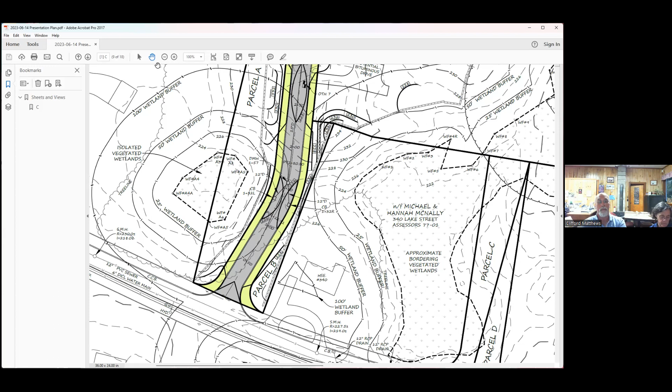Okay, yeah. So do some enhanced plantings in here. You know, if you can quantify the area and come up with a proposal for supplemental plantings in the area, that would, I said crossing, but I mean the road location. Yeah, understood. Okay, that's fine. Okay, I'll include that in my submission package to you.

Okay. And then the next thing, of course, is the crossing itself, the actual crossing. Right? Did all the commission members come out and see this, Mr. Chairman? I know that we had, we have to be careful. We did not conduct a meeting, but I think a majority of the commission members were present.

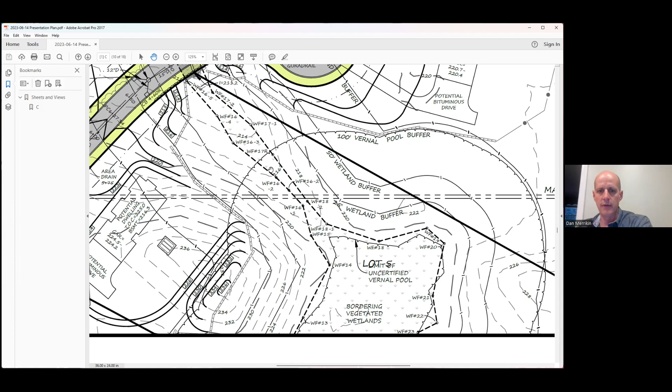Okay, so just for anyone who wasn't there, basically this wetland is an intermittent flow path. I would say 80% or more of the year there's zero discharge from this upper wetland. It all soaks into the ground because this is all sand and gravel up here. When we get a lot of rain, persistent rain, you'll get an overflow, which comes down this valley right through here, and then it ends up in that southerly wetland area.

So we have a crossing proposed here, and we are going to provide you with a little detail with a replication area. We are proposing a retaining wall on either side of the road to minimize our impacts to the wetland crossing there. And I do have a drawing that outlines this. So this is the crossing.

So there's 2,022 square feet of permanent impact to bring the road across. And that includes the road itself, the paved width of the road, plus the grass strips on either side. And then there would be a retaining wall along the edge of the right of way on either side. And then we would just grade into that retaining wall. We have picked out a replication area.

The consensus, or my view in the field, was that this particular area is not a very solid wetland. There's no hydric soils. Particularly to the north here, there's not a lot of wetland vegetation. So I don't think this vicinity would be a good place for a replication area. So instead, what we focused on was there's an old cart path, this dark green area down to the bottom left of the screen.

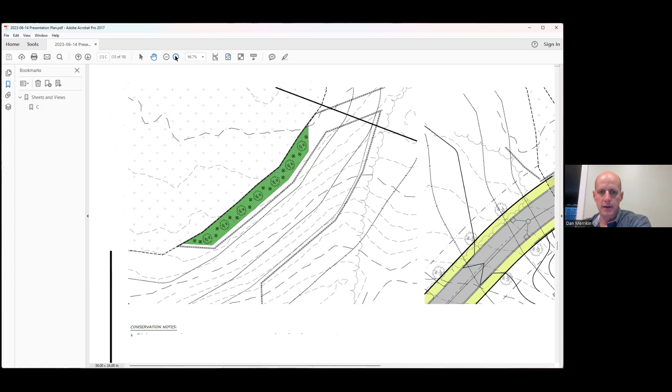It's an old cart path, right next to the wetland, so it seems to me that's a good location for a replication area. It would be at 2 to 1, and we would basically take the entire cart path, making our detailed decisions regarding grading and elevations in the field.

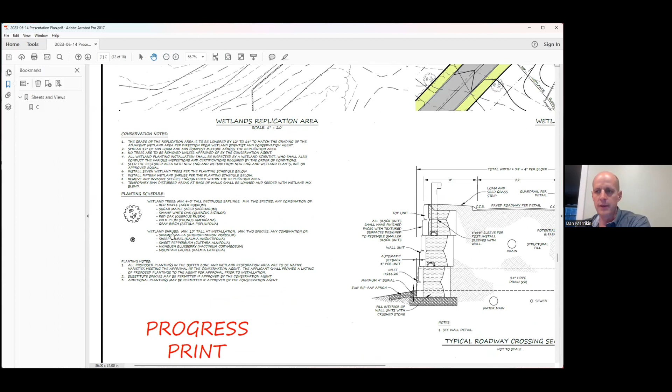Grass plantings would be a wet mix. We've specified on the plan different types of trees and shrubs that could be allowed, subject to the approval of the agent at the time of installation.

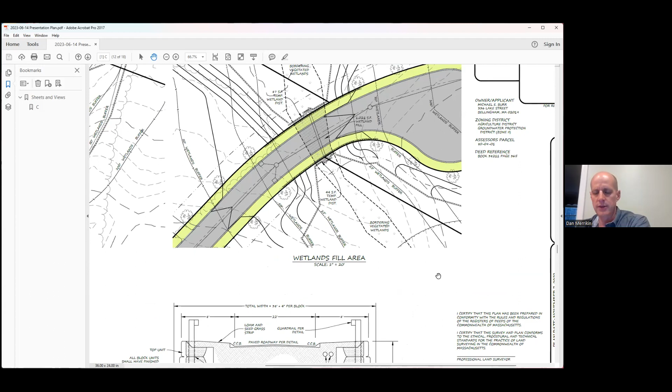This would be a cross section of the crossing, which would be a wall on one side and a wall on the other, with a little guardrail on top, the road in between. Underneath, we're proposing to run 2 18-inch drain pipes to allow, when this upper wetland overflows, that water to pass under the road and continue on its way.

That's probably twice as much pipe capacity as you'll need. We sized it very conservatively so there would be no restriction to flow. There would be a little riprap apron at the mouth of the pipes and another at the outlet of the pipes.

Are there any questions or comments on this? I think, Dan, we'll start with the easy stuff. The area for proposed replication, we reviewed in the field and determined that it was entirely appropriate. We look forward to reviewing the methodology and protocols you're going to use to establish that.

The wetland delineation that was different from the original filing, we've also reviewed in the field and found to be accurate.

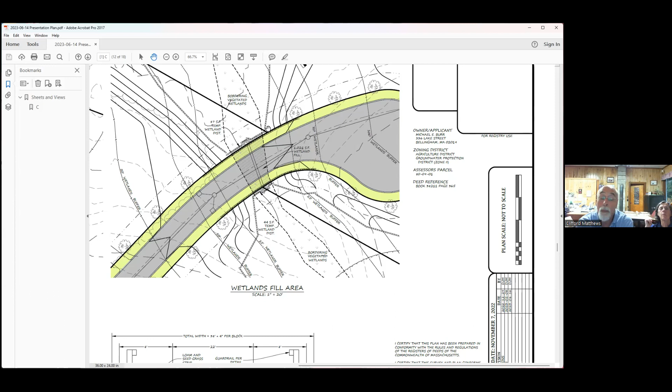I know there's one thing we looked at in the field and it doesn't appear, and there may be a reason for it. We requested that you shift the roadway a little bit to the north to take advantage of the most narrow point of the crossing of the resource area. Have you been able to do that? Because I'm looking at the plan and I don't see that occurring.

And so the issue—I'm sorry about the noise, we're getting a good thunderstorm here. Yeah, we're getting one too.

The issue with that is we have certain upland area requirements for the lots in the zoning district. These lots are all right at that boundary, and I don't think we can move it further north.

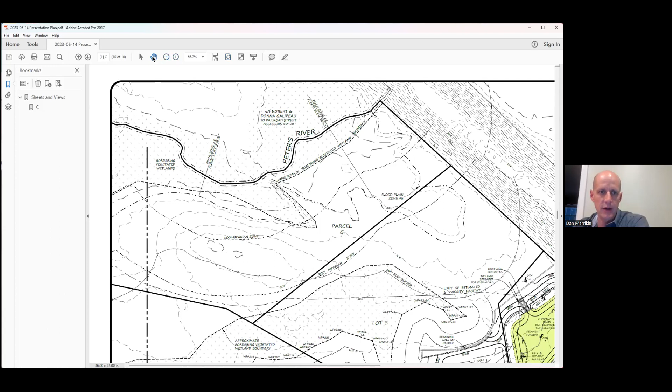Could you enlarge that? Sure. And this area is the area where that log kind of bridge is. That log bridge resides right in here, in this stretch right here.

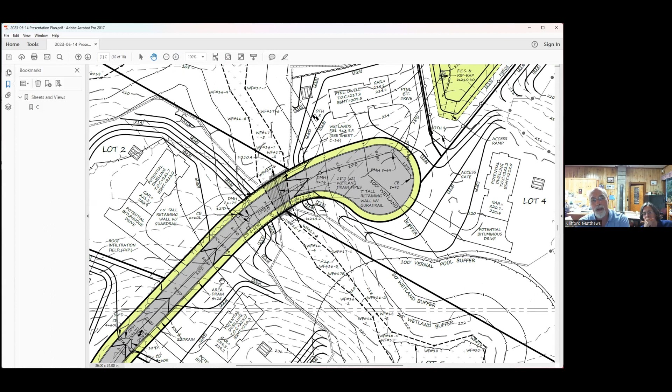Yeah, and so these are the upland requirements. Is this the lot definition that says 90% of the lot area required shall not be under the jurisdiction of the Conservation Commission? Correct.

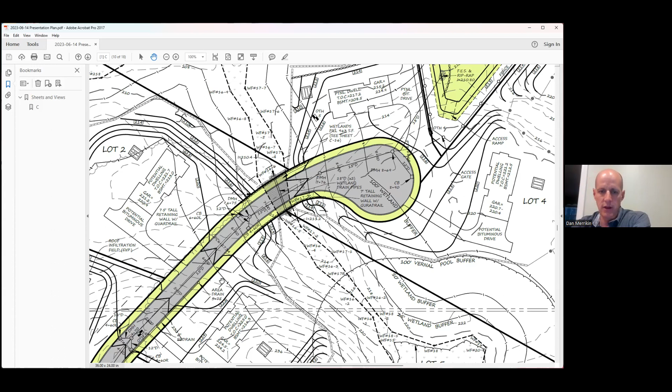I can look to see if we can, but I don't think we can move it more than a couple of feet. We really tried to curl this cul-de-sac in as far to the north as we could while still meeting the zoning requirements for each of the lots—for lot area, upland area, shape factor, and all of that.

Dan, could you shift that screen a little bit higher? I want to see that lot. Yeah, right there—that's a really large lot. This is 2-acre zoning. Yeah, it's all 2-acre zoning. Okay, so you need 80,000.

And so that upland area—now there appears to be upland area to the rear of the vernal pool. Let me pull up the layout sheet. Okay, that's good. Yeah. Okay, good. So there's lot 5, what I'm thinking here—this is lot 6.

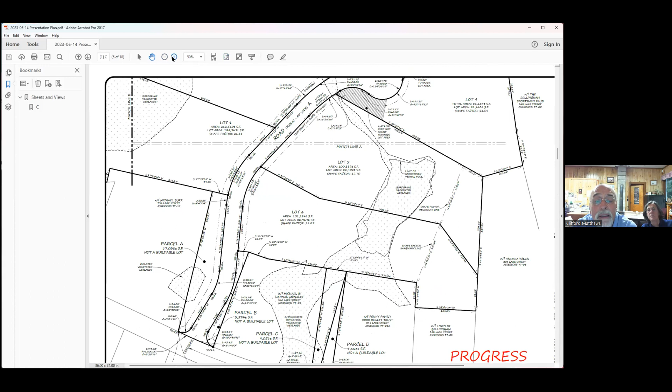So you need 80,000 square feet. Did you include the area that was on the opposite side of the wetland? Yes. That's a big lot. Well, it's 100,000 square feet, but 18,000 to 19,000 of it is wetland. So the lot area is 80. There's an extra 2,400 square feet there—not a lot of extra room.

Okay, and with the shape factor, which is very limiting—especially the back portion won't be included—right, with such large lots, it just becomes very difficult.

Okay, and it's the same thing on lot 4? Yeah, the lot area there is 81,000. The zoning lot area is 81,663, where you need 80,000. For these lots, I moved the road as far north as I could while getting all these lots to work.

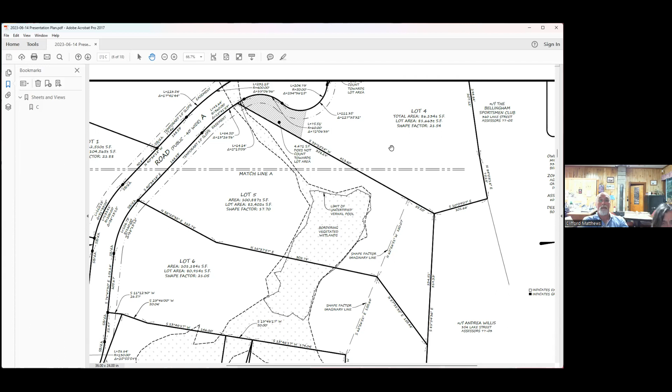We'll take a look at that. Yeah, when we get the full-size plans - it's so difficult for us to work off of PDFs on a computer. Sure, understood. We're old school.

Any other thoughts or questions on the crossing? Only that if there's anything at all that you can do to minimize the impact, it would be greatly appreciated. All right, okay, I'll revisit that and see if there's another option.

Mr. Chair, I have a quick question. So what prevention or protections can be given to that road where it's raised up? I think you had said, Dan, on the side walls it's like 6 feet of roughly elevation. Right, around 6 feet, yes. So we've got a flat road going across with a slight incline up with a log crossing area and tapered down to this wall that's less than 6 feet.

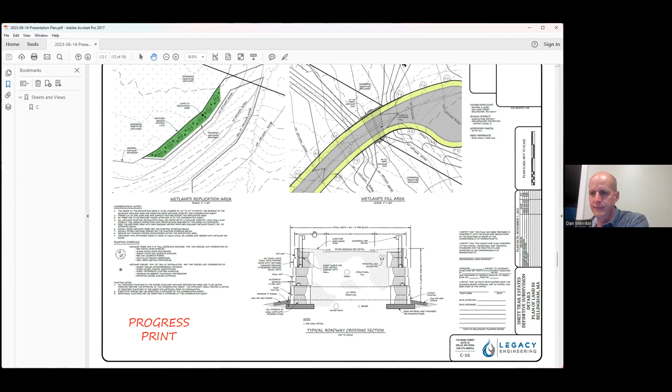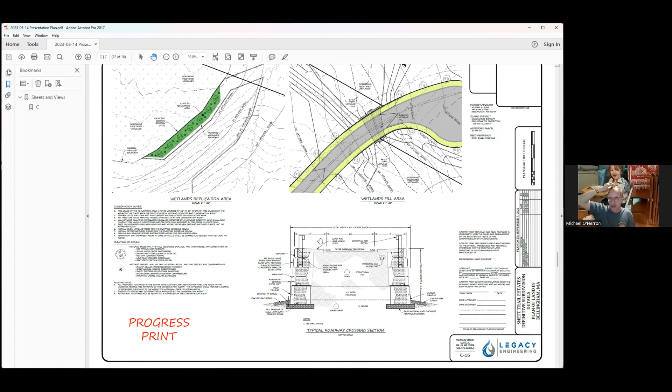There's the grass berm. How wide is that grass berm on either side? 8 feet. So my concern would be that if you're treating that area with salt and or winter snow treatments, ice treatments, there's nothing to keep it from spraying off the side of the roads. 8 feet is a minimal amount to keep something that's elevated from bouncing out and down. If it was a depressed area on the road instead, I'd have a little less concern, but it's elevated up substantially, and over a period of time, not necessarily one storm, rocks from a salt spreader or something could go in there.

Is the town eventually going to get this road? Is the town going to eventually be expected to take possession and ownership of the road? Yeah. So the way the road is graded, it's self-contained. It doesn't discharge runoff outside of the road, right?

You see there's a berm on either side of the pavement, and then the grass strips are sloped into the pavement. So all of the runoff from the road, including the grass strips, ends up on the pavement on the road, and then that goes into our catch basins, and then gets piped down to the stormwater infiltration basin. So none of the runoff from the road will move laterally - it all ends up in our stormwater basin.

Yeah, no, it's the spraying from a spreader that's going down there that I'm concerned about, sand and salt going off the sides as they treat the road - not runoff. I see that you've got that tended to, but a guardrail's not going to stop it. Any area that's sensitive on either side of that is probably going to be affected negatively over a period of time.

I don't have a solution, I just want to make an observation. With an 8-foot wide grass strip, I would be surprised if you saw any significant throwing of salt or sand that far outside the road. The town doesn't want to waste salt and sand - they want to keep it on the pavement.

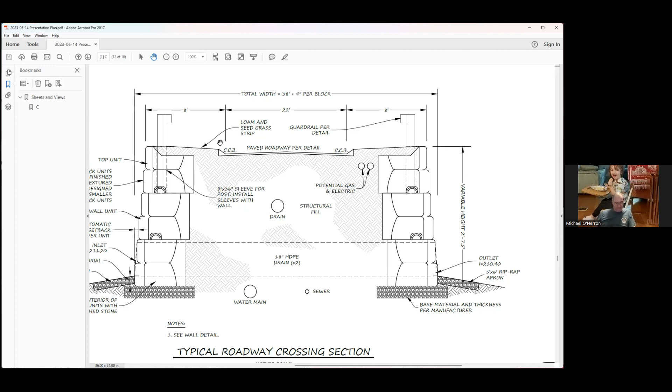Now again, without putting some sort of additional wall or fencing that's solid on either side, which I don't expect necessarily to require, because we haven't required that of anybody else in town - I just make an observation that I was concerned when we were talking about raising the roadway up so much, my first initial reaction was, okay, what about winter time, just raising it. Okay, thanks. Any other questions on the road crossing area?

The last thing I wanted to chat about: we would like to get the trees cleared here just once. So if the commission is amenable, the limit of work here would define the limit of tree clearing, and then we would be in front of you for every lot for a notice of intent, except for lot 4. But every other lot is going to require a notice of intent, which would identify all the specific requirements for lot development and construction. I just wanted to run that by you.

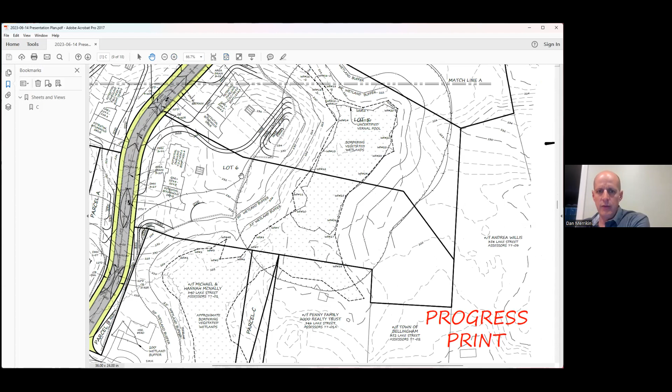Let's go through the limit of work on the plan so you can understand it. I'm going to start backwards. On lot 6, which abuts the vernal pool, we have a limit of work that runs along the 50, and then it runs along the vernal pool buffer at 100.

On lot 5, we are proposing to do a little bit of work in the vernal pool, at the outside edge of the vernal pool buffer, because the applicant doesn't want to have a mountain in the backyard here, this is a big hill. This doesn't have to be permanently disturbed — it could just be regraded, loamed and seeded, with some trees planted on it. That's what we'd like to do. Then running along the 50, and then we have the crossing.

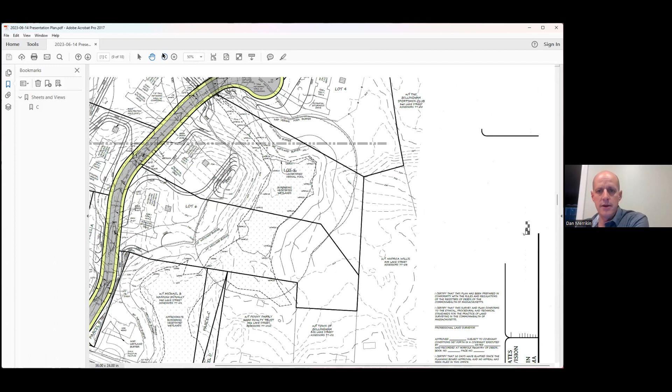On lot 4, we're not showing any work in the 100-foot buffer to the vernal pool. So as it's contemplated now, lot 4 would not have any work in a buffer zone. At the stormwater basin, the erosion control is at the limit of work, the limit of grading.

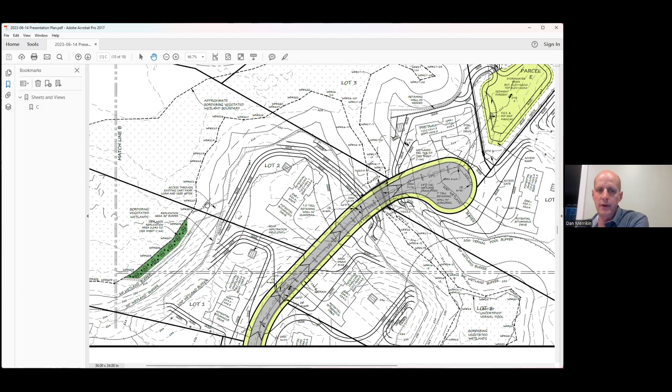Lot 3 is one we'd like to talk to you about. Holding the 50 is going to make this very challenging — there won't be much yard. We're wondering if it's possible to expand this limit of work somewhere in between the 25 and the 50. Then we would come around the crossing, and again here we'd run along the 50 and out. For the replication area, we'd use the existing cart path to access it and do all the work there. Then we'd come out and take the old cart path in this area, clean it up, loam it, seed it, and let it go natural.

Thoughts on that? So your question is, we understand these lots are going to require individual notices of intent. Are you telling me you're proposing that when you're in there to clear the roadway, you clear the lots up to the 50? Is that what you're asking? We're asking if the commission is okay with us setting the limit of work here so that all the clearing can be done at once. Or is that something you want decided on an individual lot basis?

It's something we usually decide on an individual lot basis, because as the lots are developed, there could be minor changes to house locations due to existing site conditions. We need to be able to address these issues on a site-by-site, lot-by-lot basis. This is my opinion — I don't know if the commission has any additional thoughts. We're looking at lot... I can't read it... this one's 3. That's the one, 3. Oh, there it is, yeah, 3.

On occasion we have allowed work in the 25 to 50 buffer with mitigation. So before you file that, you may want to have an area where mitigation could be provided — supplemental buffer zone plantings, those kinds of issues we've dealt with successfully in the past. But individual lots are individual lots. We understand the need to try to maximize the utilities and subcontractors you're going to be using, but we're looking at 6 different lots that are going to have individual notices of intent, and the commission needs to maintain control over the development of the individual lots on a case-by-case basis. That's always been our policy.

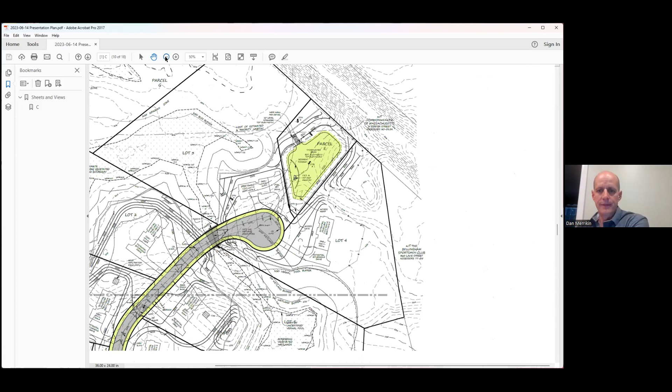Understood. Okay, good. So if you have any other questions for me, happy to answer them. Otherwise, I would ask for a continuance. I think my next meeting with the planning board is the middle of July — I don't know when your first meeting in July would be. We only have one meeting in July, so our next meeting after the second meeting in June, which is the 28th, would be on the 26th. We could put you on at 7:15.

But before we do that, we wanted to talk about the peer review. Oh yeah, go ahead. No, go ahead.

So, yeah, initially, we did not anticipate the need for enhancement or replication or crossings. And so when the scope for peer review was developed, we had an engineering only scope of review.

So we're going to need to revise that so that we can have our peer reviewer take a look at these additional wetland area impacts, buffer zone impacts. And what we're gonna do is we're gonna request the administrator to interact with our peer reviewer to develop a revised scope. And then once that scope is approved, these plans that you're submitting will be immediately forwarded to them so they can commence with the peer review process.

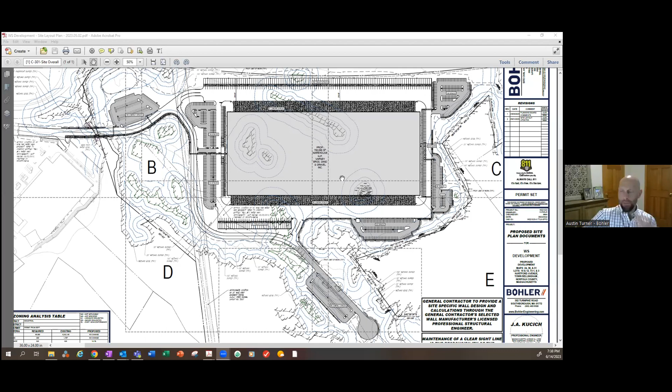Okay, so I'm assuming you can see the overall site plan, right? We can. Okay, so this is the new plan. I'll show you a comparative graphic. Actually, let's start with a comparison graphic. It's probably better. So I'll start up in the upper corner here. The red layout is the original layout that we had started with, and it's how the program started. So you look up here, this is that satellite parking area as you're coming in off the main driveway. Obviously, the big building is here, this big gray hatch. The red is the original footprint.

What we've done is made this parking in here. And we did that because on one of our field visits, we had talked about wanting to provide additional separation from this resource area here. And it helps us reduce and compact the impervious footprint as well. So we've substantially reduced that footprint, which I think is a good thing, obviously. And we'll get into this a little later, but if you recall, this is the area where we were originally contemplating a surface stormwater basin.

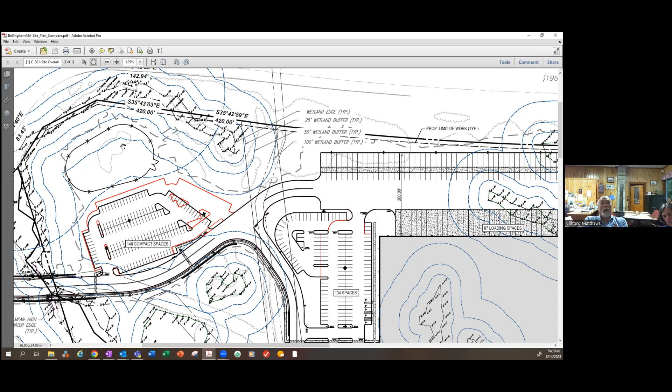Right. And as we collectively have been walking around out in the field, we said, boy, that area feels like it might be better suited as an enhanced mitigation area potentially. Remember, there's a lot of high canopy in there. We noticed the color of some of the leaves looks like water maybe flowing through there seasonally. And we have perched soil, and we'll talk about what that means. And we saw maybe a foot down or so a potentially restrictive layer, and we were going to do some confirmatory work in there to figure out what that restrictive layer might be and how that might support a mitigation area. So in consideration of that, we've reduced this footprint.

The second area I'll go to is down over here. This has been one of the areas we've spent a lot of time talking about. This is that area on the cul-de-sac, at the end of the access driveway. If you recall, we identified this again as a team as being of importance. So the red line again is the old parking boundary. The black line here is the retaining wall and then edge of pavement. We reduced the number of spaces that were down there, and we pulled it further away by making those spaces more compact.

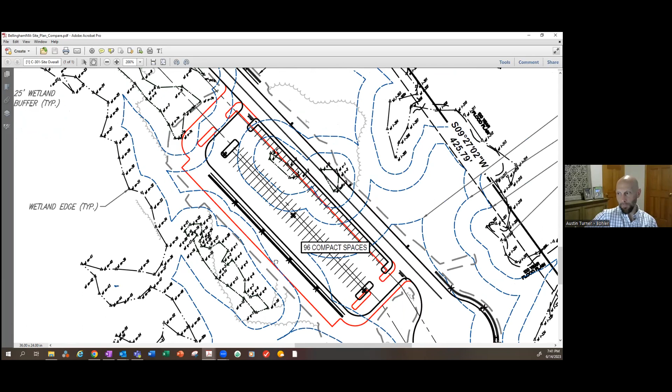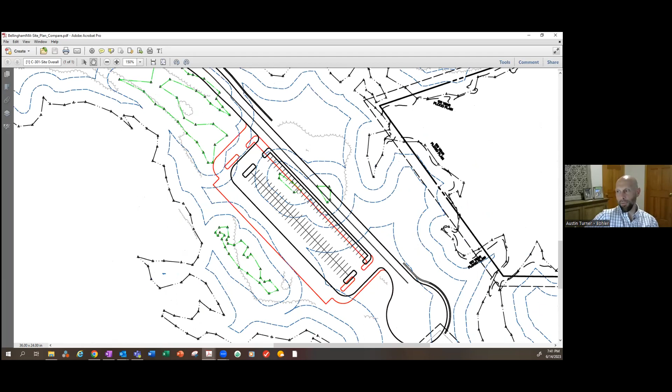So this blue line here is representative of the 50-foot buffer: reduced footprint, and further away from the wetland system, to achieve a balance or close to a balance in the parking. What we did is displace those spaces up here to the top. So just for context, I'll zoom out a little bit so you can see the whole thing. These spaces and some of what was here went over here. We do have a slight reduction in parking.

We're down maybe 14 or 20 spaces total from what we were contemplating originally. And as you recall, Cliff, I think you even mentioned it in some of the site walks, the planning board and the peer review team have had a similar sentiment to what the Conservation Commission and our discussions have been, which is, hey, we'd really like you to reduce the impervious footprint of the project.

And we did that. And we've worked pretty closely with the peer review team and the planning board and have some alignment with planning board and the peer review team where they believe this is appropriate in terms of meeting the spirit and intent of their comments, as well as being what we've kind of collectively determined operationally appropriate for the facility.

So with that in mind, before I pivot into some of what we want to do next with mitigation and some of the testing that we want to do in the field, I'd very much appreciate the commission's input and insight as to what this looks like, what it means, before I get into what this affords us the opportunity to do in terms of mitigation.

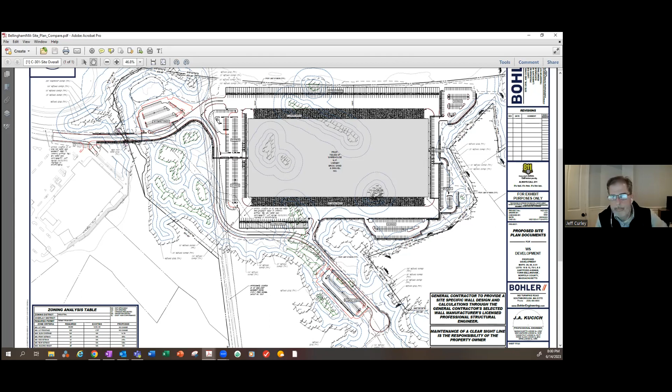Jeff, I think so. And that was kind of the second part of this discussion. Understand that one of the interests of the Wetlands Protection Act is the protection of groundwater and public water supply. And this is in a water resource district, and future development with future extension of roadways. It's not advisable for the town of Bellingham to permit further development on this site.

Now, we're running up against our next hearing, and what I am going to do is prepare a document relative to the soils that we discovered in that cul-de-sac, which we feel qualifies as a regulated resource area, which would preclude the utilization of that in any event. So we're going to provide that for you, and we'll get it to you as soon as we can develop that.

Can I ask a quick question about that? Certainly. So with the summary of what you have identified, obviously we want Brian and the team to be able to review that. Of course. And then obviously conduct a field visit and either confirm what you're putting in that document or provide some kind of counter facts to it, right?

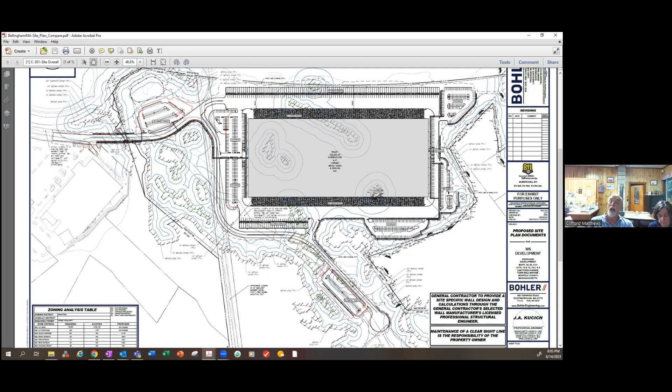Well, that makes sense. And I would certainly like to participate in the on-site review of that. So, okay, so I think we're going to Cliff. What was the next dates we had available for discussion, right? Okay, well, I'm looking at 6/28, which is our next meeting, because there's only one meeting in July. And I think, will you have an opportunity to get that work performed prior to that meeting?

Potentially, but I can't speak for Brian, but one of the things that could be a discussion topic for us is if you have the ability to share with us the summary of your observations based on what we're calling a cul-de-sac, and maybe have Brian review that document, potentially go out in the field if he needs to do that, and have that be a topic of our discussion on the 28th if we don't have field data. I can't guarantee that we can get that done, Austin. No. I can't guarantee that we're gonna get that done.

Okay. Or I mean, would it be, just thinking out loud, would it be reasonable, and I'm speaking for Brian's calendar, so Brian, I apologize, but provided Brian has the ability in the next 2 weeks to get out in the field to look at that area, maybe have him do his own assessment out there, and then he could present what his observations were. We can talk about it in the public forum and have that discussion, provided you won't be able to have that document available to us. Does that feel appropriate?

Why don't we get our information? Yeah, I mean, you guys can do your research whenever you want, obviously. But what we'd like to do is submit what our observations are before we start having discussions on it, just so that we have the document in hand. It would be advisable to have Brian go out, or alternatively, you can wait until we provide you with the information, Brian can review it, and then we can all go out in the field together. Which makes sense too, right?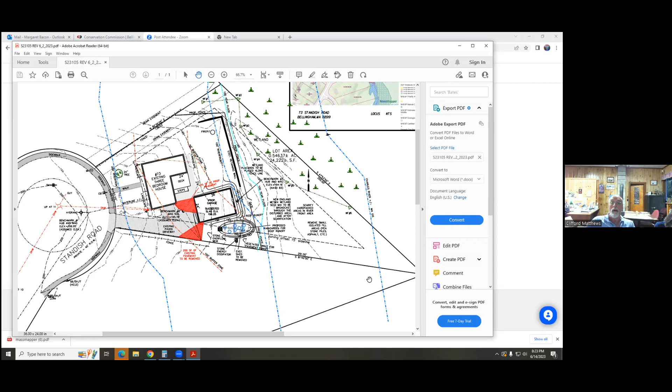So Michael, I'll second again. Steve, any further discussion? All in favor? Aye. Opposed? Okay, by unanimous vote.

So what I'll do is I'll draft up some special conditions and get those out to the commission members, so you have an idea of what we discussed tonight.

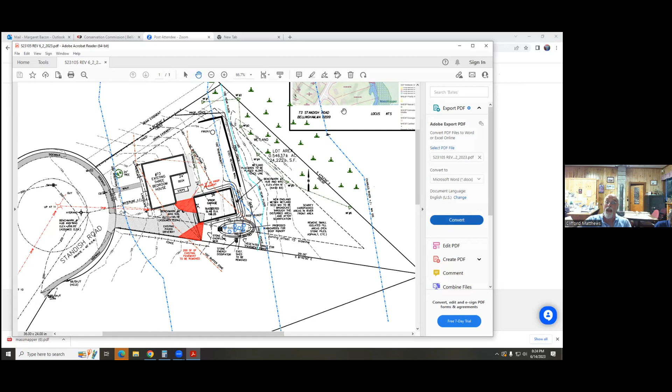Thank you, Margaret, thank you. Thank you, couple. Take care now. You too.

We'll proceed to the next one. Oh, should be good, let's see. Okay, so.

He was on for 8:30. All right.

All right, we have a little bit of sad news to report. Our administrator is in receipt of a letter of resignation from Brian. He's had some health issues and he's having a little difficulty finding the time. He's been a valued member and one of the people that we could always count on to attend the site walks, attend the meetings, and be there for signatures. And personally speaking, he will be greatly missed.

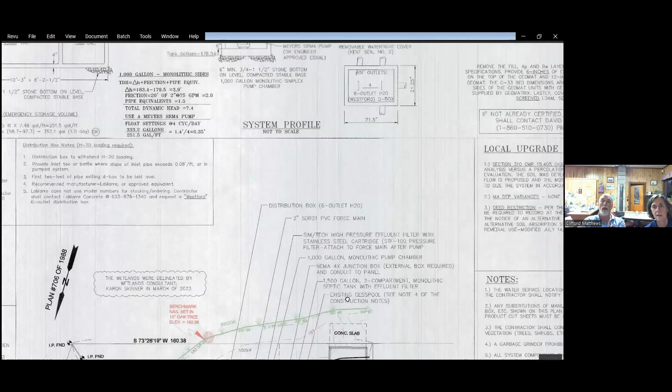Yeah, that's good. Does everyone know where Elbow Street is? No. Just between Hand Street and... that's between the shoulder and the wrist. Yeah, I was just showing Mike that, but my camera's not on. Yeah, I see it. Okay, I'll be aside, but go ahead. You know where Payne Street is? When you come down Payne Street, you look- go by the entrance to New England Country Club toward Brooks Corner. Oh, there's a locus map on this plan. Steve, can you slide it up a little more? Pocket, right? Keep going, keep going, vicinity map, keep going. Move towards... and now right, go, move it to the left, no, other, no, that's it, I'll go left, there you go, okay, there it is, there's the locus.

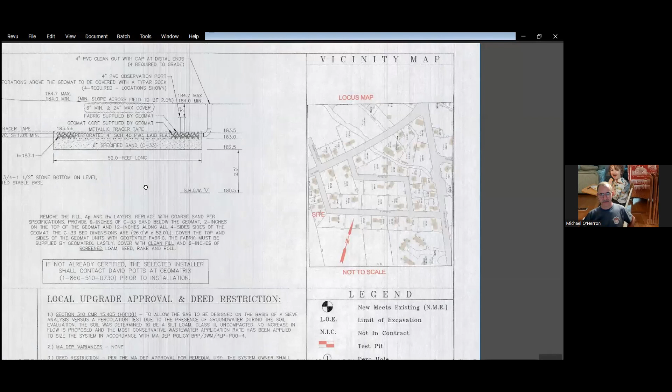Good, so you can see Payne Street, which runs almost diagonally across the top of the screen. Elbow Street is the road at the bottom. The entire neighborhood is within the floodplain.

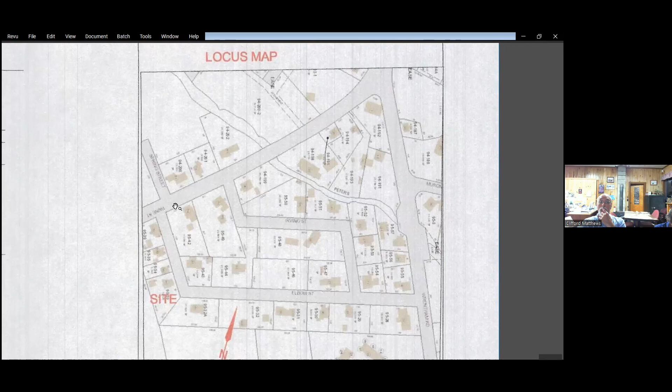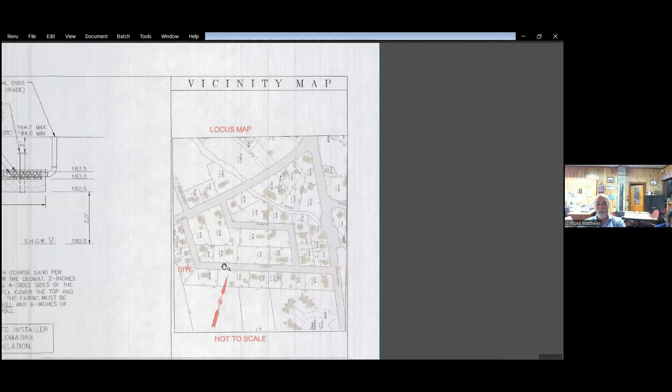So when the notice of intent was filed, the administrator, at my direction, contacted the applicant's representative to inform him that he would need to provide compensatory storage at incremental elevations in accordance with the performance standards for work in the floodplain. So he came up with a narrative saying there's not much they can do, that they're minimizing the amount of fill required. Upon site review and further review of the plans, we realized the system was going to be installed at grade.

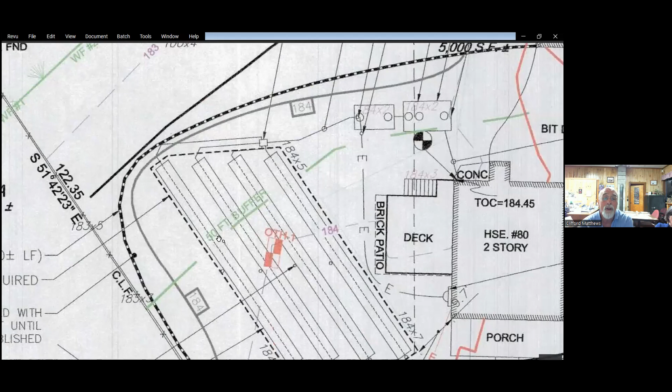So it looked like they had addressed all their issues, except that the portion of the leaching field was within 50 feet of a regulated resource area right there. You can see the green, there's the 50-foot line. That requires a local upgrade from DEP under Title V, and it slipped through the cracks—they were not aware of that. But my understanding, correct me if I'm wrong, is that they've gone to the Board of Health and been granted the local upgrade for this system.

Yes, so finally all the ducks are in a row and we can get the failing septic system replaced. What do you mean when you say local upgrade as opposed to local waiver?

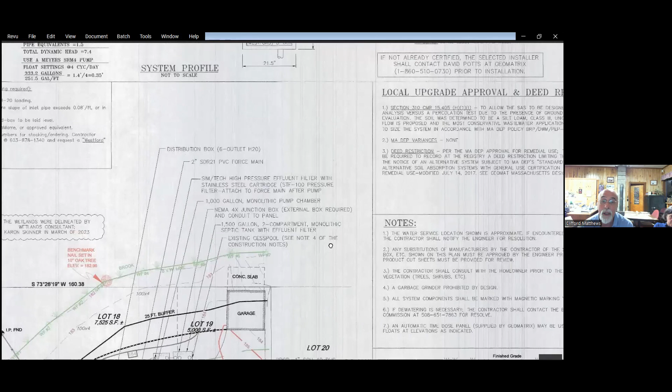Well, it's a Title V term, and what it means is it's an upgrade from Title V. Title V requires 4 feet of separation to groundwater. Occasionally we'll get a local upgrade—there it is, he had it almost. It's more of a local downgrade, really, isn't it? It's DEP, I mean, we're in double speak here. There it is: local upgrade approval and deed restrictions, okay. Yes, it makes sense to me that it would be a downgrade.

That area is not on sewer? Wait a minute, that says no variances. Cliff, what, he filed that form? Yeah, they filed. Paul DeSimone, I called Paul and told him he needed to get the local upgrade

from the Board of Health. I also spoke with Vin, who's representing the Board of Health now since we don't have a Board of Health agent. I told Vin that this system did not have a local upgrade and that we couldn't possibly close the hearing without that. So they went back, Paul DeSimone contacted DEP and DEP agreed.

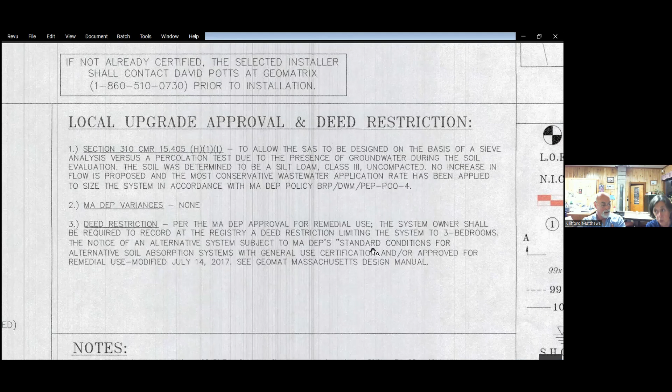DEP told him if he filled out, I don't have the name of the form, it's a form the state uses for local upgrades, he completed the form. I believe it was in your Dropbox. The Board of Health received that and approved the system with that request.

So it's not on this plan, it's a separate document. So is it here? That might be it. Okay, yeah, I see it. There it is, this is the form that was completed.

Thank you, it's helpful. So, 50-foot setback to 29, I got it. Are you proposing that we move forward on this without an accurate plan?

No, we have an accurate plan. This is the supplemental information that DEP has granted the local upgrade. It doesn't show on the plan, but it doesn't change the construction of the system or the prohibitions attached to it. It is perfectly legal.

I'm getting a notice for an admit. Oh, maybe it's Paul. Should I admit? Yes. Yep, disappeared. I did it. Okay.

That might be him. Hello? Hi, you guys there? Yeah, we're waiting for you. We just started the meeting without you. Okay, that's okay, I thought it was at 8:50, am I late? Well, I think I asked you to be here at 8:30, but that's okay, you're here now, that's all that matters. Oh, sweet. Sometimes you guys are too good to me.

So, Paul, just to recap: we went over the fact that the system's being installed at grade, there's no alteration of the floodplain, so we're good there. We are within the 50-foot buffer to a regulated resource area, and we were discussing the form for local upgrade.

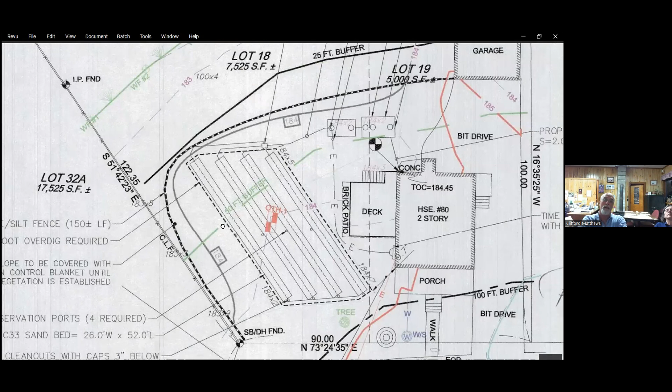So you filled that form out and you received approval from DEP? Yeah, I haven't heard anything back from them. We're all set with the Board of Health, I understand.

When we did this type of system, okay, this is an alternative system. The difference between this and a conventional system is that it's only 2 feet to the water table instead of the typical 4. The purpose of this type of system is to actually clean the effluent better than stone and pipe, which would be a conventional system.

I wouldn't stand at the end with a glass, but it's supposed to be clean water coming out and going into the soil. And the perc rate here was so slow that filtration down to the water table is going to take a long time anyway, so it's going to be filtered out pretty good by the time it gets there. It should be pretty clean.

As far as the setback, within the 50-foot buffer, even though that's a DEP rule, and of course the 4-foot separation is a DEP rule, these alternative systems were approved to go into these areas. So we requested the setback. I was told we didn't really need to by the engineer that did the calcs for me on this type of system, but we submitted it anyways.

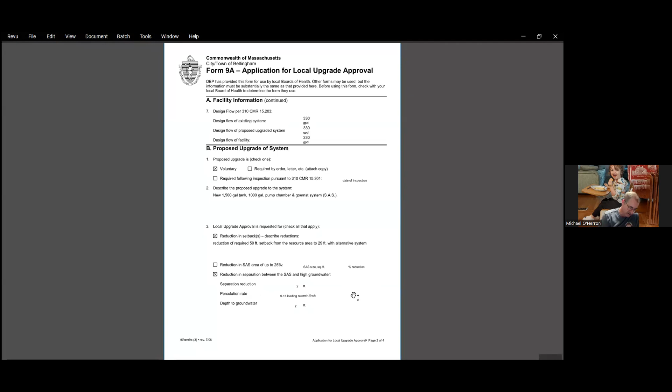Yeah, because it's an alternative system, those setbacks really don't affect this. I mean, the purpose for this is to have clean effluent coming out of this thing. Again, I wouldn't stand there with a glass and try it, but it's supposed to be pretty clean. You know, with a conventional system, we tried to put a bed in here and it would have been about maybe 10 to 15 feet off the wetlands. These alternative systems are designed smaller because of what they do.

So again, this is a geomat. It's new technology, it's approved by the state, and it's supposed to get the job done. And that's all we could fit in here. If we would have went bigger, we would have asked for a lot more waivers. Okay. 25% reduction and stuff like that. But this was the best fit. This was the best system for the fit here.

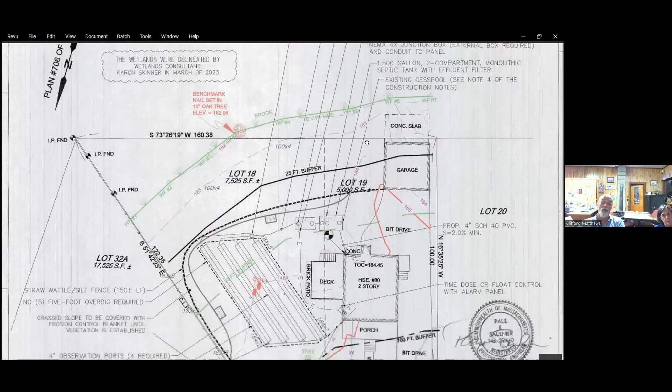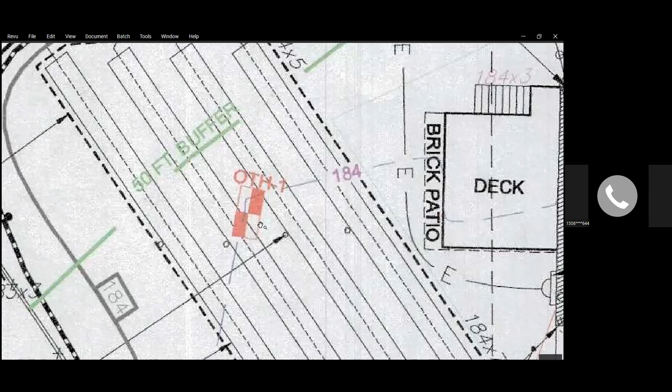So, Paul, based on your field experience, would you guess that this lot had previously been filled over what was a much more expansive wetland system? You know, I wasn't out there doing the testing, Steve was, but he told me that when they dug that test hole, which is right in the middle of the system, that OTH1, they were hitting peat down below. Of course, peat to me, that's a swamp. It was down at 64 inches.

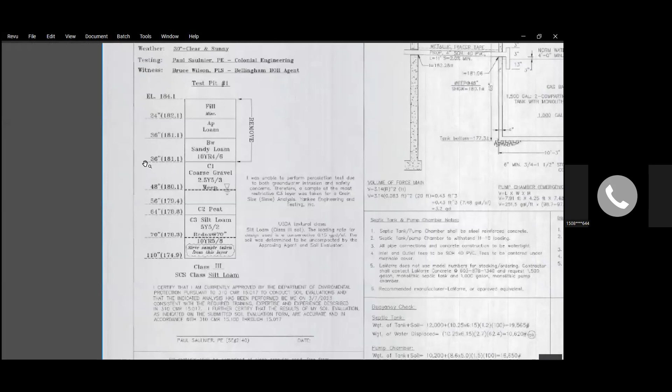If you look on the plan over to the left where it says percolation testing soil test pit, you can see down on that chart there that C2 is peat, and there it is, 64 inches. So that's pretty deep. Was that just one time that they hit that, or did they hit more than once? Well, they only did that one test hole, and you can see where it is. It's up around the 184 contour, right next to the house. Go ahead.

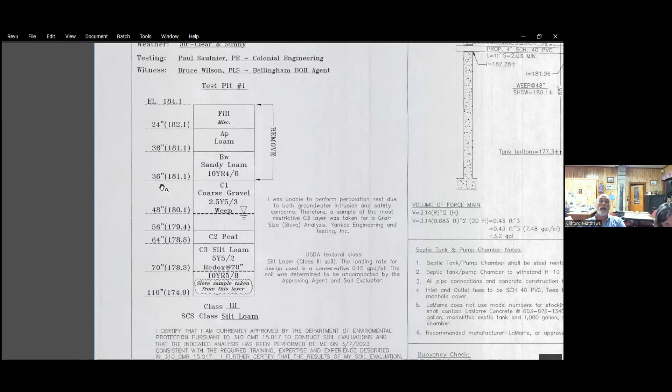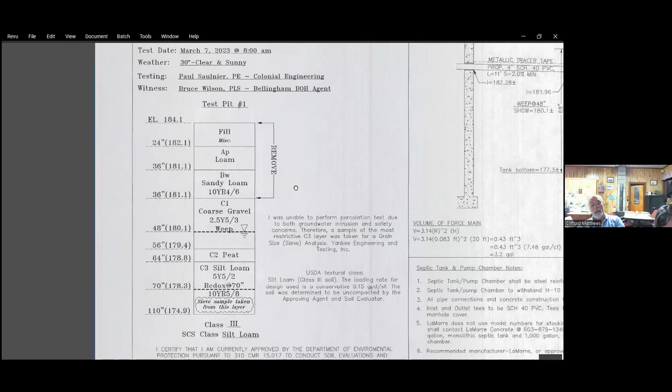That tells us you had weeping at 48 inches, 10 YR 4/6, just above that. Yeah. We suspect that all of these houses were built on a swamp many years ago. They just filled the swamp and built the houses. I totally agree. This is what we're dealing with now. I mean, we did one down at the other end, which was pretty good material, but it wasn't near the wetlands and it wasn't in the floodplain either.

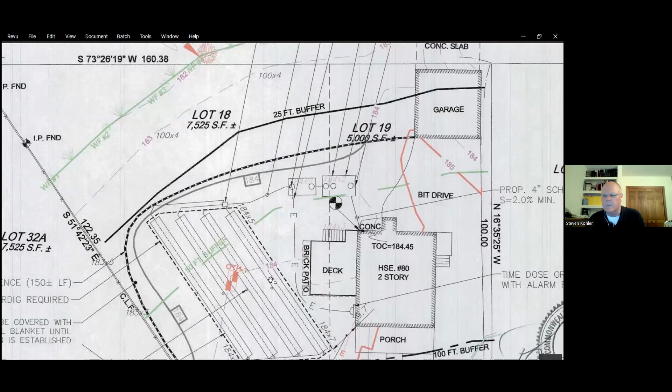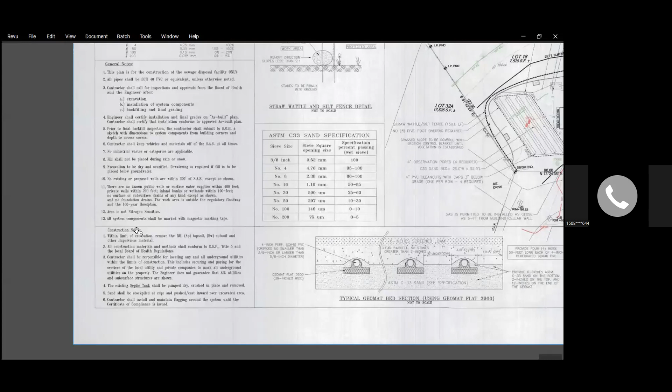Mr. Chairman, can I ask a question? Certainly, go ahead. Is there any remaining activity by the existing cesspool, and does it interact with the new system at all? No, there should be a note on here on how to remove and abandon that. What they usually do is pump it out first, then fracture the bottom and fill it with sand. That's one method. Or they'll rip it out completely and take it off site. How the contractor will deal with it, we don't know yet, but you'll use one or the other.

And that will be inspected by the Board of Health during construction. Okay. I think the answer's right here. Yep, remove. Okay. Perfect.

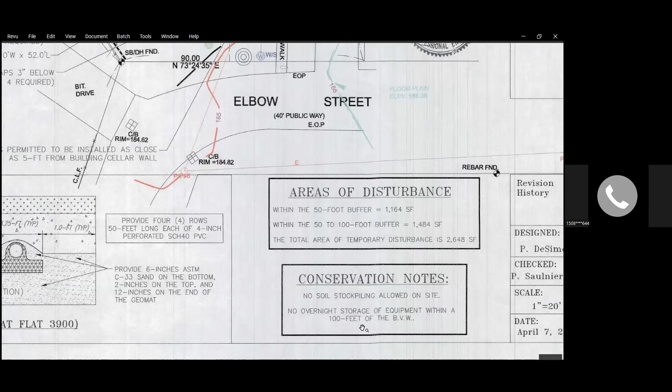We gave this to Eric. He does these conventional systems, these alternative systems. He tried a different type, didn't fit. This was about the fourth try on fitting something in there that was reasonable. It wasn't one of these just throw it on the plan. This was thought out pretty good. It's a major improvement over what was there. Oh, definitely, absolutely.

I mean, it's been reviewed by the Board of Health. It's been engineered to meet standards that are new, but that aren't our standards. They're DEP Title V standards. I think that the administrator has distributed a draft order of conditions. I think it would be in all of our interests to close the hearing and move forward and let the people repair their failed system.

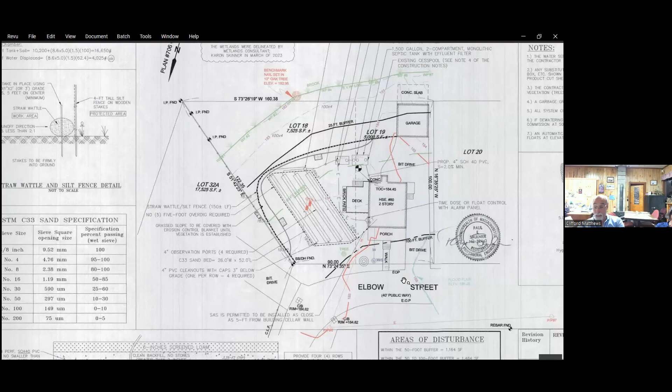I'll entertain a motion to close the hearing and sign and issue the order of conditions. So moved. Stephen, second. Ariane, any discussion?

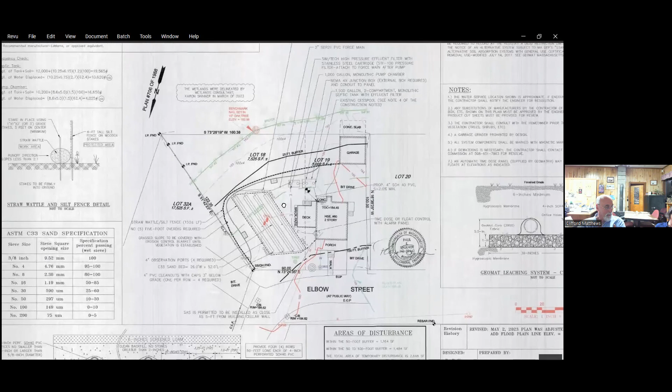Okay, all in favor? Oh, right, never mind. All in favor? Aye. Aye. Opposed? Okay, by unanimous vote. All right, guys, thank you. Paul, that'll go to you for recording. Yeah, go ahead and send it. I'll record them. Sure. Thank you.

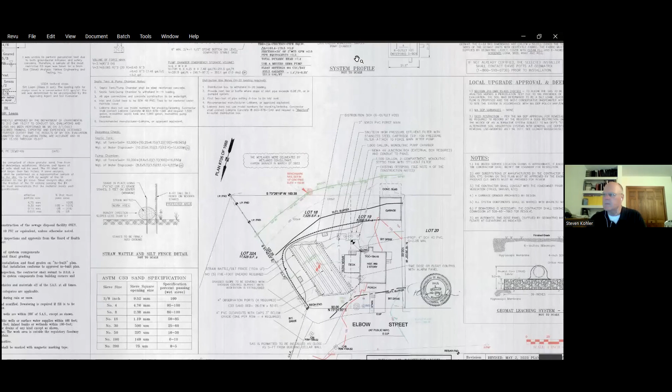All right. I'm gonna stop sharing. Oh, wait. I had one question for you real quick. In the order of conditions, what type of erosion control? Because these guys want to get going right away. Well, they have to get their order first to record it. No, I know, but they want to at least get the erosion control down. I think you specified wattles with silt fence. Yeah, Steve just zoomed in. Straw wattles with silt fence. Yeah, but I didn't know if you're going to change that in the order or not, if you want to do a mulch tube or silt fence.

Well, I'm not a big fan of wattles. You had straw wattles, backed by entrenched silt fence. But you had straw wattles staked 5 feet on center, that's not gonna work. You gotta stake them closer than that. That was in the order. But the silt fence is gonna be important. Okay, that's why, because once I get the order, I'm going to stake it for them, and they're going to put that down right away. I just want to make sure we're clear on what they're putting in over there.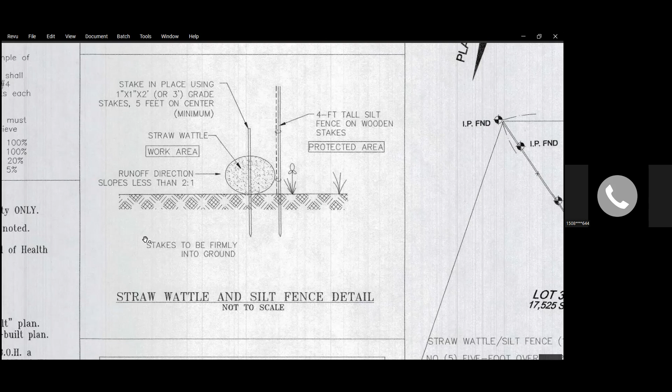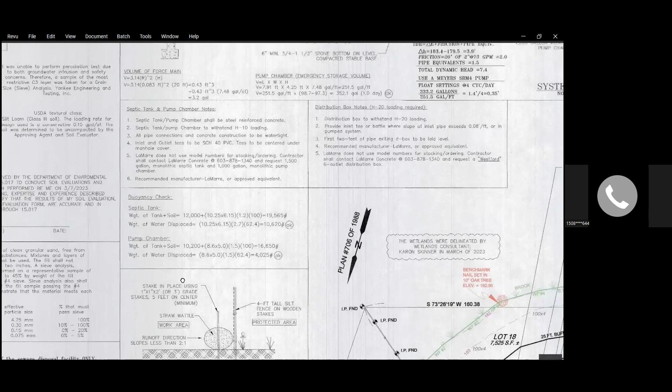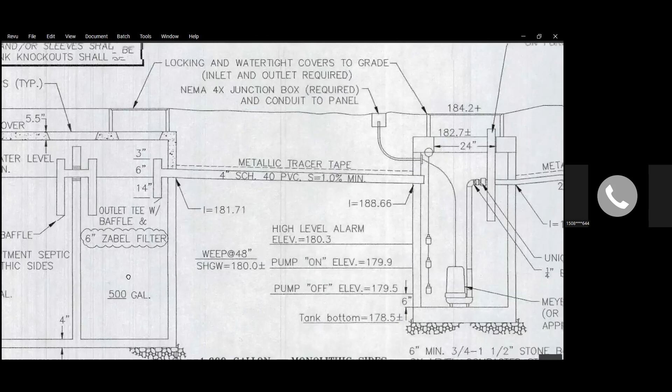We can do a mulch tube with the silt fence. I have no problem with that. It's whatever you wanna do, as long as the silt fence is in there. Mulch tubes are an improvement over the wattles. The wattles will work because of the silt fence. But whatever you want to do, the administrator has the right to make changes in the field. We'll inspect the sediment and erosion control before construction. They're gonna at least get the erosion control in right away, then when the order of conditions is recorded, we can get going. All right, send it to me, or if you want me to pick it up, Ian.

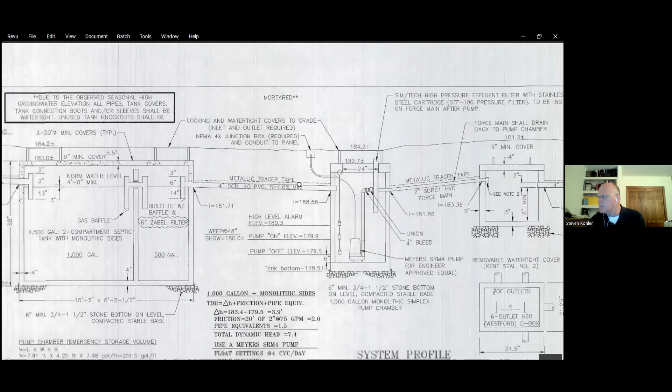I have a question. I just noticed this has an ejector pump in the system. How does that cover for power outages? Well, there's an alarm on the house. It's shown there. You got a 1,500 gallon tank. It takes about 3 days to fill, and then it goes into the pump chamber, maybe 6 to 8 inches before it pumps out. That 1,000 gallons gives you another 2 or 3 days storage.

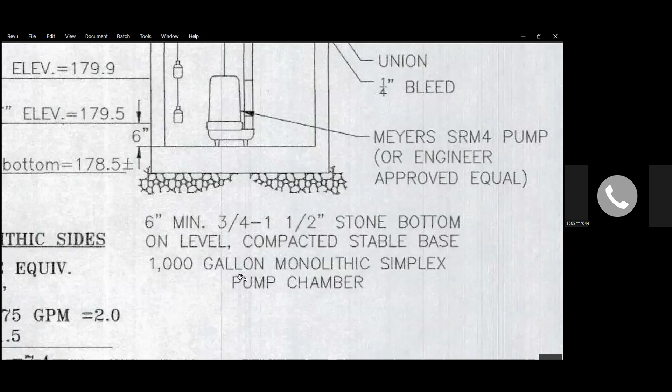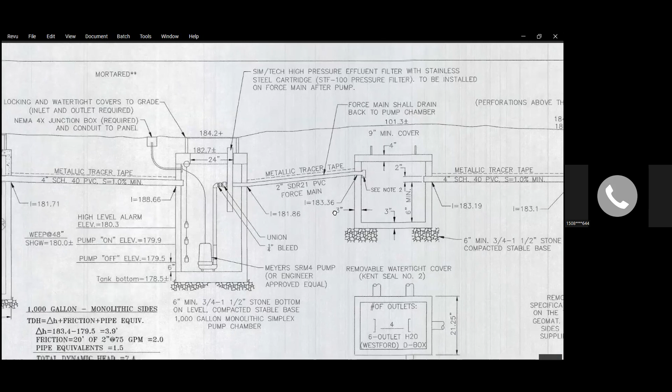So if there's a power outage, you can still flush the toilet because the water will work, and it will go into the tank and then the pump chamber. You'll have a couple of days to fill the pump chamber before it starts backing into the house. So for a power outage of a day or two, you shouldn't have any problems. Beyond that, you'll probably have to call someone to pump the tank. The main tank or the pump tank? Both of them. Okay, thank you. Sorry for the late question. That's okay.

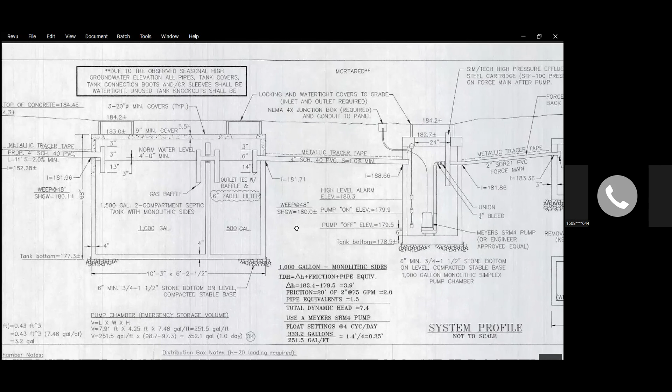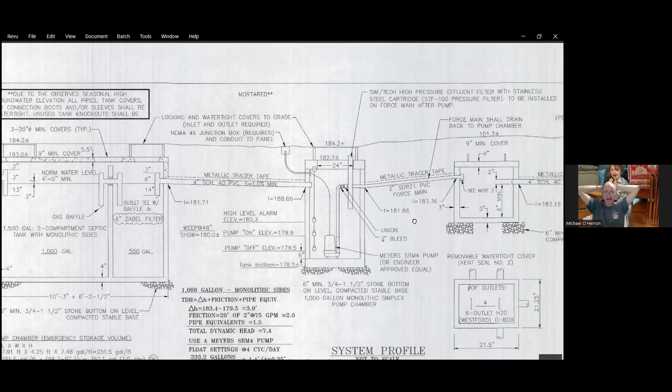Then you'd be up the creek without a pump if they're out of power. Is the alarm electrically powered? Does it have a battery backup? Because what's the point if you lose power and don't know? Well, those alarm systems have a battery backup. So if the power goes out and the tank fills beyond the 6 or 8 inches we design, that alarm will go off regardless of a power outage.

So if it is 100% full, does the backup go into the house or into the surrounding property? It will come right back up into the house. Then you'll have a mess. Okay. 7:45.

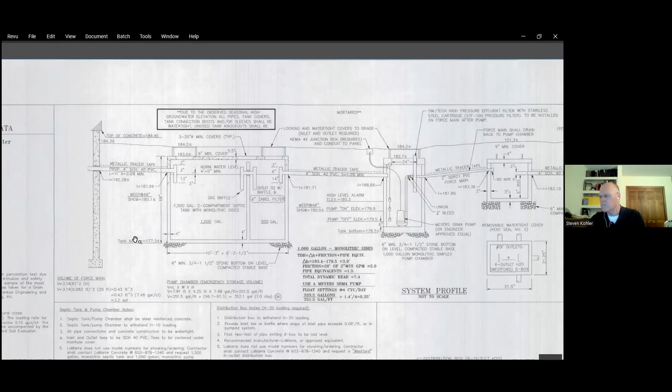Right. We already closed this hearing. Right? Yes, this hearing's been closed. Okay. Thank you. After we have one more hearing, it's a continuation request, then we'll see what we can do about signatures.

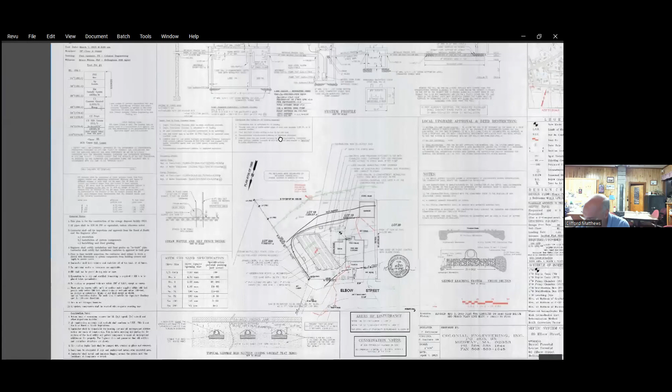All right, let me know if you want me to pick it up or you want to mail it, just let me know. I'll be in touch, Paul. Thanks. All right, Ann, thank you. And thank you, guys. Okay. Take care.

All right, the Bellingham Conservation Commission will hold continuations of public hearings in accordance with the Wetlands Protection Act, General Law, Chapter 131, Section 40, and the Bellingham Wetlands Protection Bylaw, the notice of intent with the proposal to construct 12 3-unit townhomes, stormwater management system, septic system, and grading within a 100-foot buffer zone to bordering vegetated wetlands and within estimated habitat located at the Assessors Map 59, Parcel 60A, Blackstone Street and North Street, Bellingham.

Ryan Racine, Goddard Consulting, Northborough, Mass. has submitted the filing on behalf of John Masujian, Raven Homes, Northborough, Mass. The continuations will be held online via the Zoom option on Wednesday, June 14th at 8:45. So this is a project that is a buffer zone project for us, but they're proposing 12 3-unit townhomes on a very small parcel.

The planning board has expressed displeasure with this, and the applicant is meeting with local homeowners in an attempt to try to come up with a more amenable development. So we have nothing yet. We don't know where they're proceeding with this. It's going to require, I would imagine, a revision. And along with that revision, it will need peer review for the stormwater management system, provided that they stay completely out of the 50-foot buffer zone, which the original proposal did.

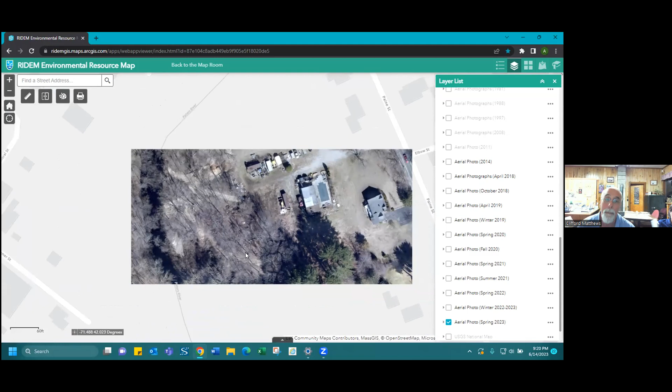And what happened was they started pulling that out. And as they pulled the material out, they were putting wood chips on top of the voids that they were creating. So we talked to them about that, told them that they can pull out the waste and the trash and the debris, but they really shouldn't be filling it in because it's floodplain, and they had agreed to remove some of the material that had been placed there. At some point, we're gonna have to go back down there and take a look at it. But this is a situation where they inherited a real mess, and it was not of their own creation. They're trying to fix it. It's all in the riverfront, it's all in the floodplain, and it was a disgusting mess. Somebody didn't do their due diligence on the site before purchasing.

Yeah, so we got a phase one. They got a good deal. Wow, we can't believe we bought 7 acres of land for such a low price. Like I said, it's like a free kitten. Yeah, it haunts you the rest of its life. So anyway, we're working with them. We're aware of it, Ariane. They have, however, performed some valuable services because they've removed half a dozen windfalls right out of the Peters River channel, which was welcome, and dragged them up onto the riverbank and cut them up and hauled them away. So we're watching it.